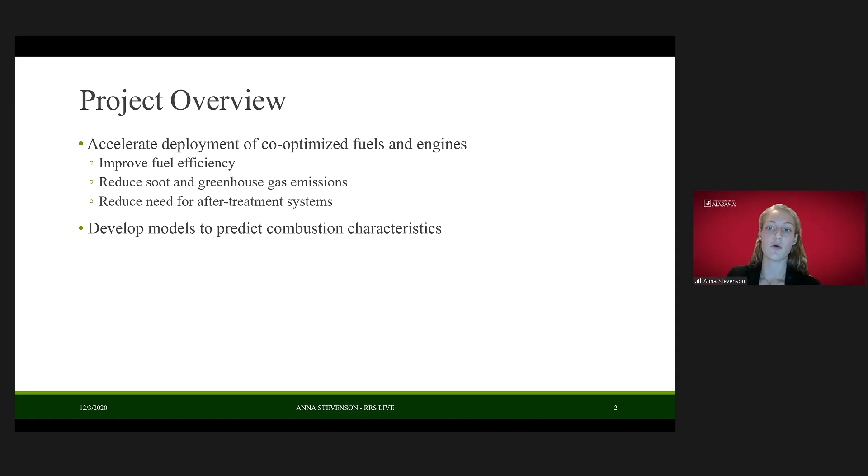Additionally, current diesel engines require expensive after-treatment systems in order to meet strict emissions regulations. So by working to reduce emissions, we can work to reduce the need for these types of systems. Our project is supported nationally at several different labs and universities, including here at UA, where our individual work focuses on developing models to predict combustion characteristics for different fuels as they combust in an engine-like environment.

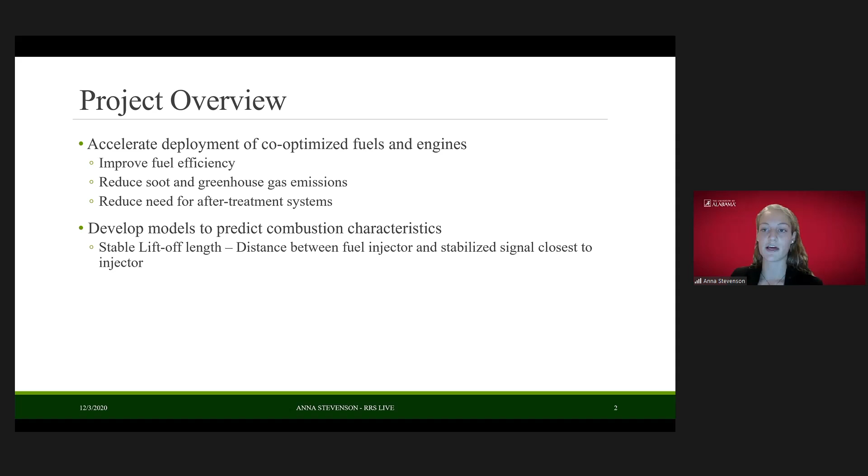There are two parameters that are typically used in order to describe combustion behavior, which I will briefly define here before going into more detail about later. The first is liftoff length, which is defined as the distance between where fuel is injected and where signal shows up closest to the fuel injector. And the second is ignition delay, which is defined as the time between start of injection, or SOI, and when ignition actually begins.

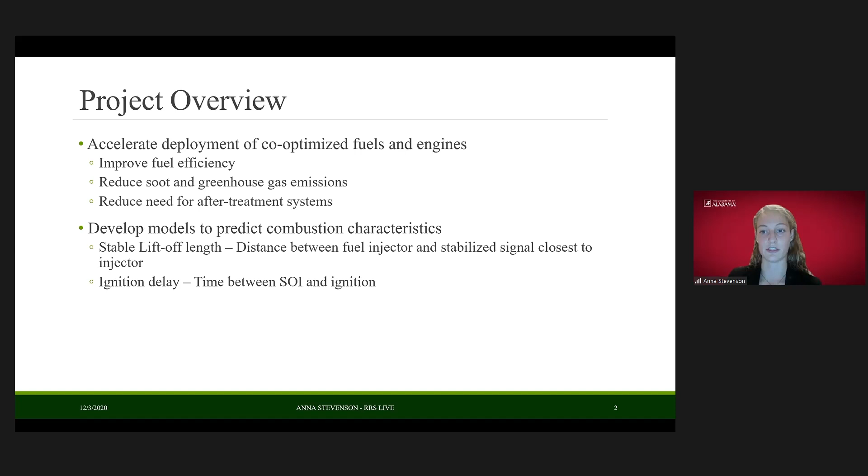In order to collect data to analyze these different fuels, we use a constant pressure flow rig, or a CPFR. Fuel is injected into this chamber, which is able to simulate ambient conditions of temperatures up to 1000 Kelvin and pressures up to 50 bar. This chamber is able to maintain highly repeatable, nominally constant test conditions, and we're able to obtain large data sets on the order of 360 fuel injections per hour, which allows us to collect large, statistically significant data sets and then analyze them. The chamber also allows for line-of-sight optical access, and we utilize 3 different types of optical diagnostics in order to study fuel injection reaction behavior.

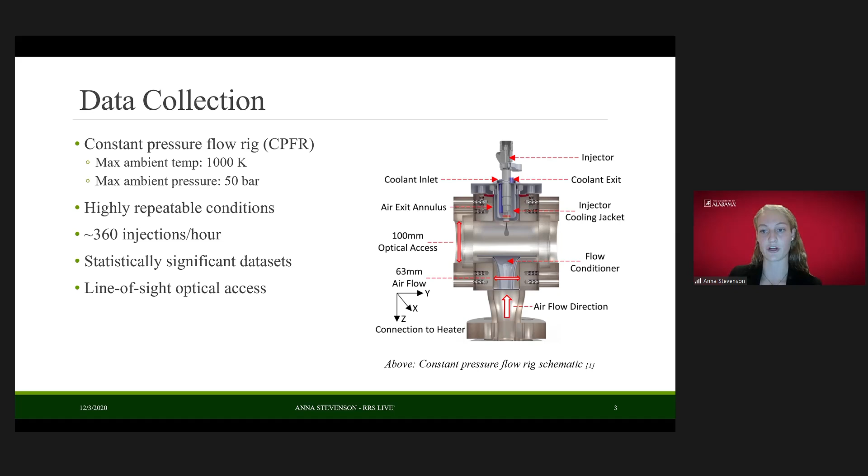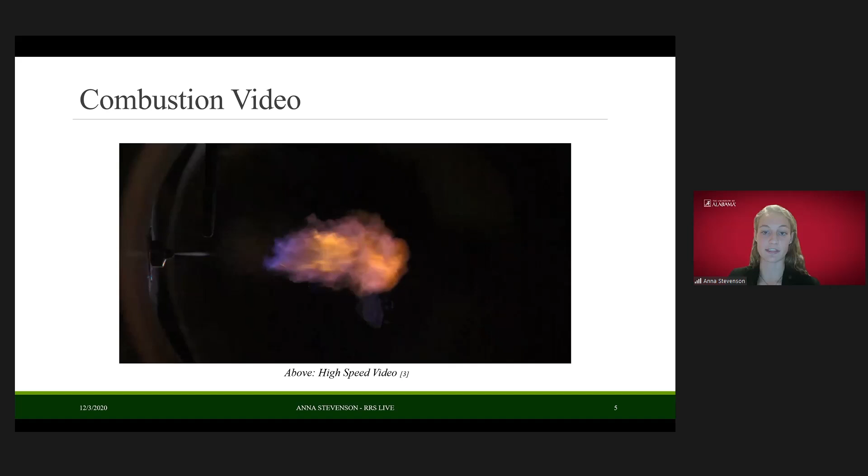This is a high-speed video of the fuel injection, ignition, and subsequent combustion processes inside of the spray chamber. The injection lasts approximately 2 milliseconds before igniting downstream. It's important to note that this video has been rotated 90 degrees for viewability, and that in actuality, the fuel would be injected and propagate downward.

This is another video that shows the simultaneous playback of 3 different optical diagnostics we use to study the fuel injection, ignition, and combustion. On the left, you'll see the chemi camera. In the middle, you'll see the RSD camera. And all the way on the right, you'll see 2-color pyrometry.

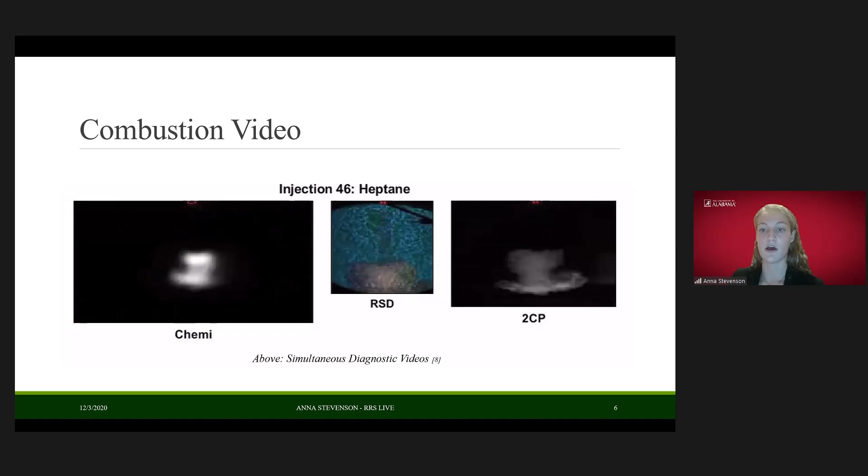Again, the chemi camera shows us flame structure. The RSD camera shows us how the fuel is mixing with the air. And the 2-color pyrometry camera shows us where the soot is forming inside of the flow rig. When you see bright spots show up in the middle of the chemi and the 2-color pyrometry frames, as well as a yellow spot show up at the bottom of the RSD frame, that indicates that ignition has begun.

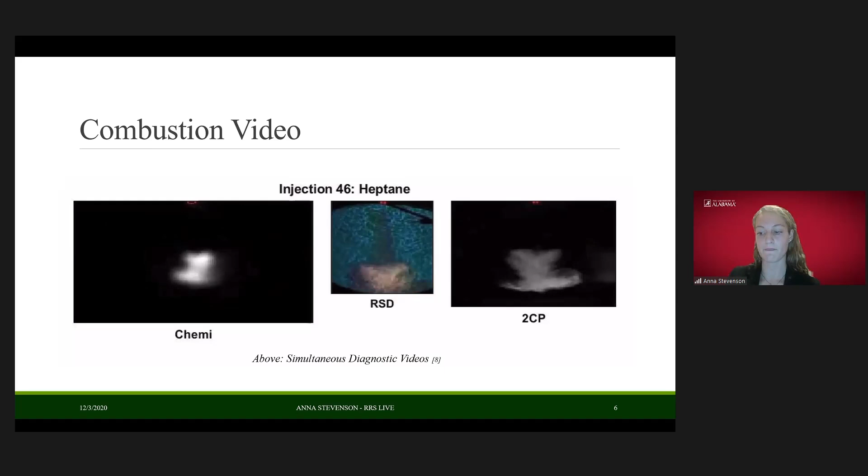My role in this project has dealt primarily with analyzing data from the chemiluminescence camera. The chemi camera provides us with qualitative information about the structure of the flame. The chemi camera picks up signal once ignition begins. So before ignition begins, there's no signal and the image is simply black.

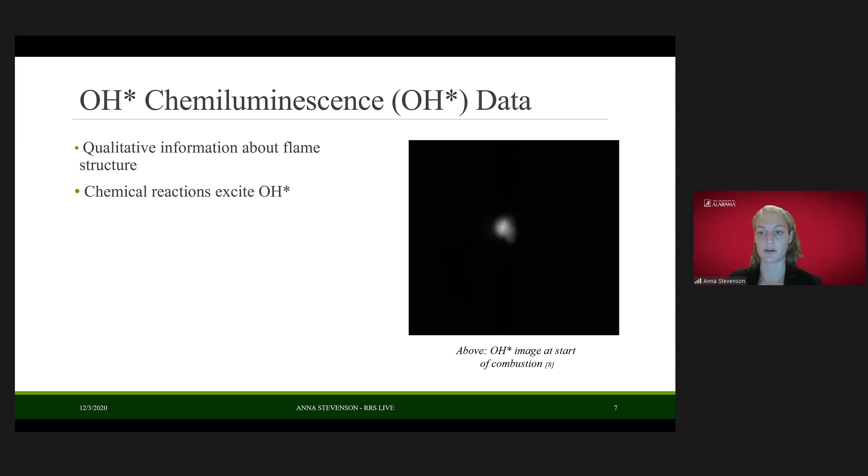Once chemical reactions excite OH, the camera starts to pick up the signal, so you start to see a bright spot. And then as the flame propagates throughout the chamber, the signal becomes most dominant where the flame stabilizes downstream.

I was tasked with using the chemiluminescence data in order to quantify liftoff length and ignition delay for N-heptane fuel, as well as 2 fuel blends, N-heptane blended with 10% butyl acetate and N-heptane blended with 20% butyl acetate.

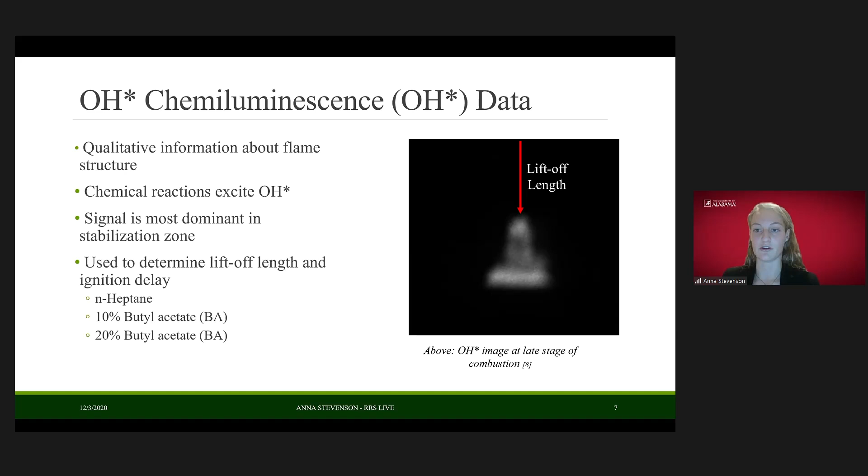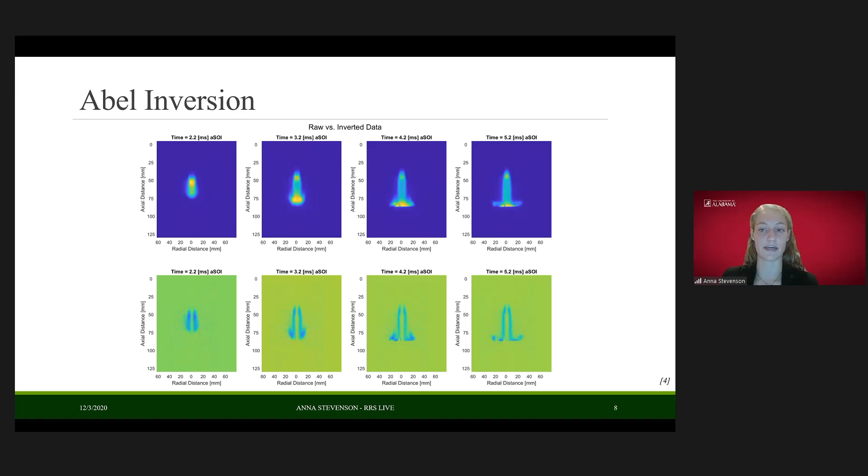The Abel transform reveals that a majority of the key reaction zones are occurring around the edges of the flame as opposed to the center, which is what the raw data might appear to indicate. Boundaries can be detected using this inverted data and overlaid on the raw data, again highlighting that the key reaction zones are occurring around the perimeter of the flame as opposed to the center of the flame.

If you imagine taking those boundaries and rotating them, you would see that the key reactions are occurring around the edges. These boundaries can be tracked throughout time, and they can also be detected fairly well, although sometimes they are affected by the presence of background noise, which moving forward we are working to mitigate.

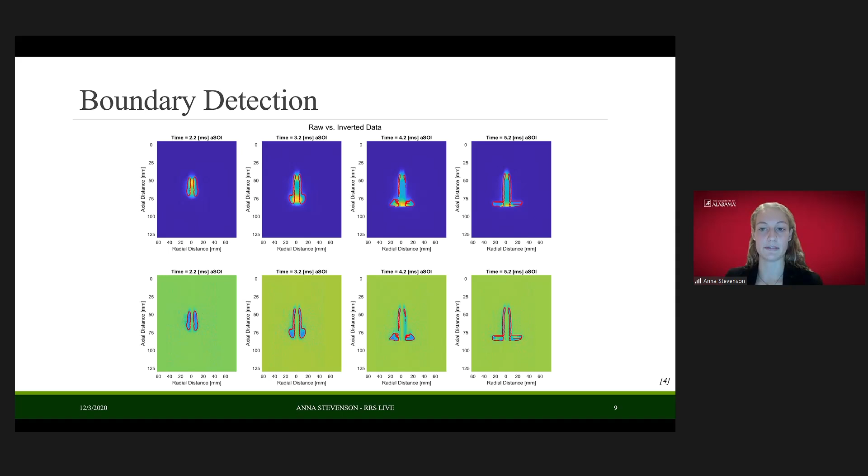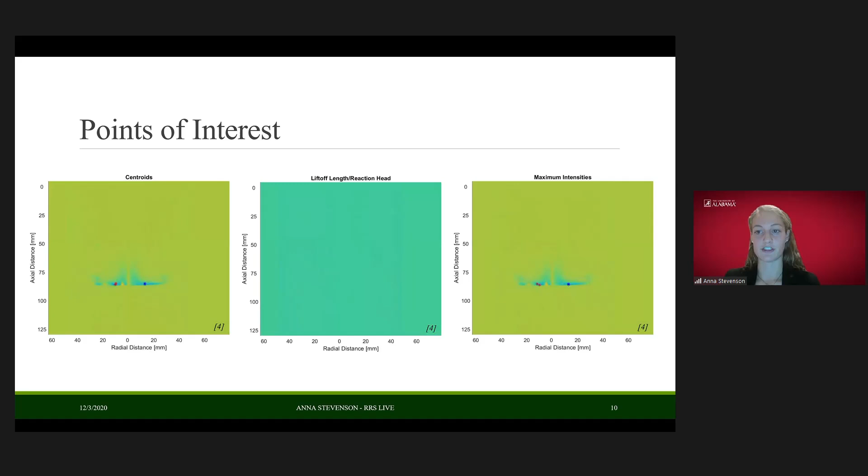The boundaries can be used, as I said, to track 3 key points throughout time for each injection. On the left, the centroid is being tracked. In the middle, the liftoff length and reaction head, essentially the extreme maximum and minimum of the boundaries, are being tracked. And on the right, the location of maximum intensity is being tracked.

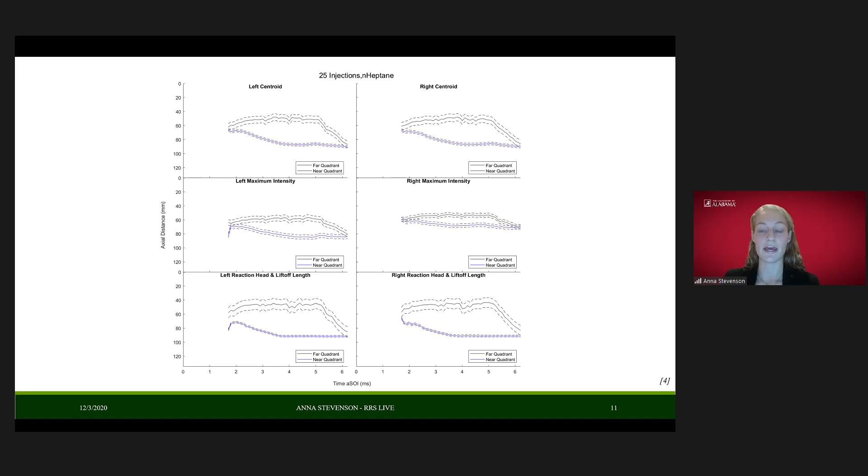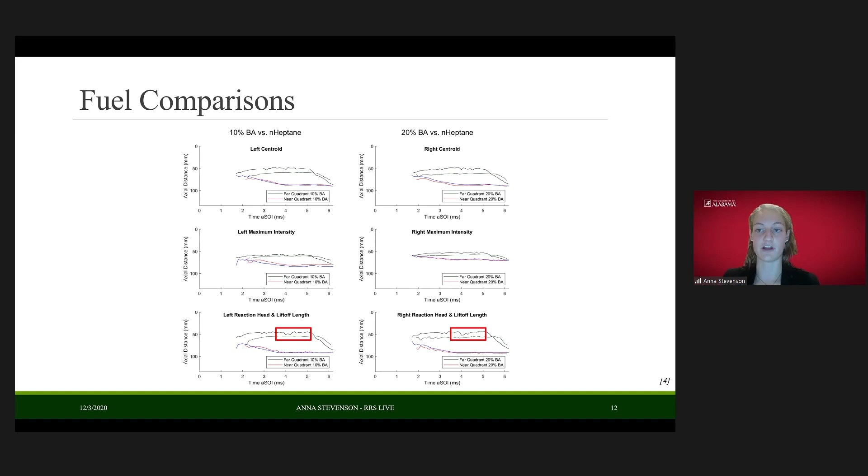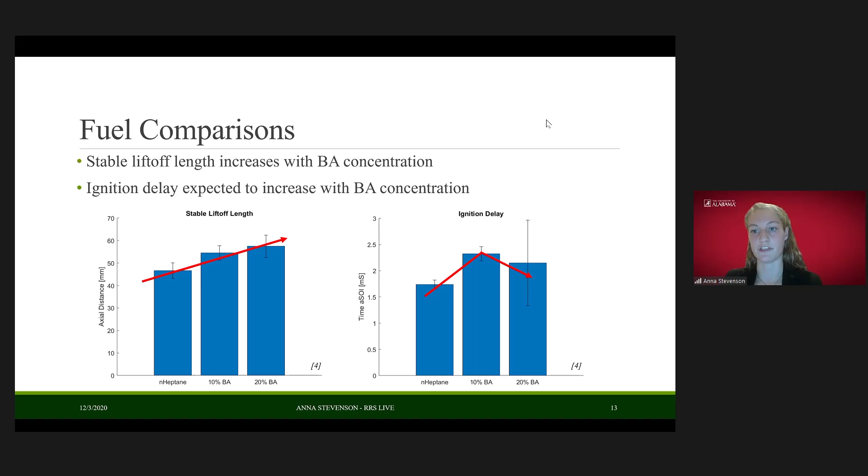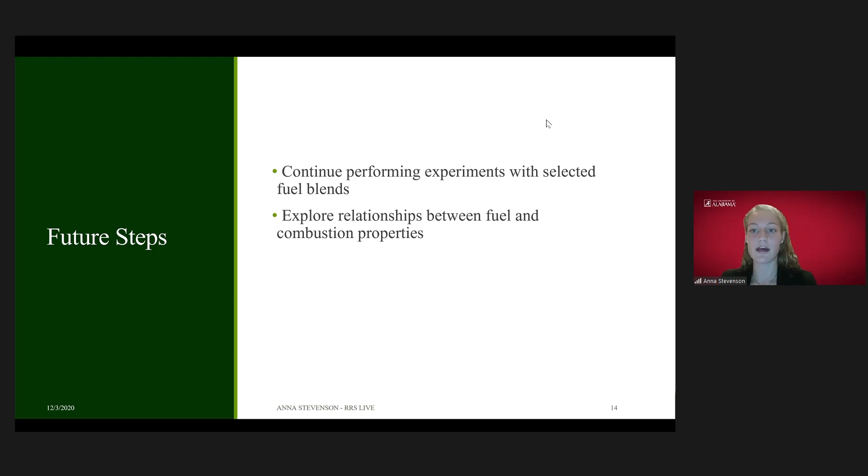And moving forward, we will be analyzing more injections in order to gain a more comprehensive understanding of both of these trends. So in the future, the goal of this project is to continue performing experiments in the chamber with different fuels and fuel blends and to explore the relationships between each type of fuel and how it combusts inside of the chamber. Ultimately, the goal is to be able to compile comprehensive combustion characteristic indicators and develop models to predict which fuels and fuel blends will be the most efficient and the least emissive.

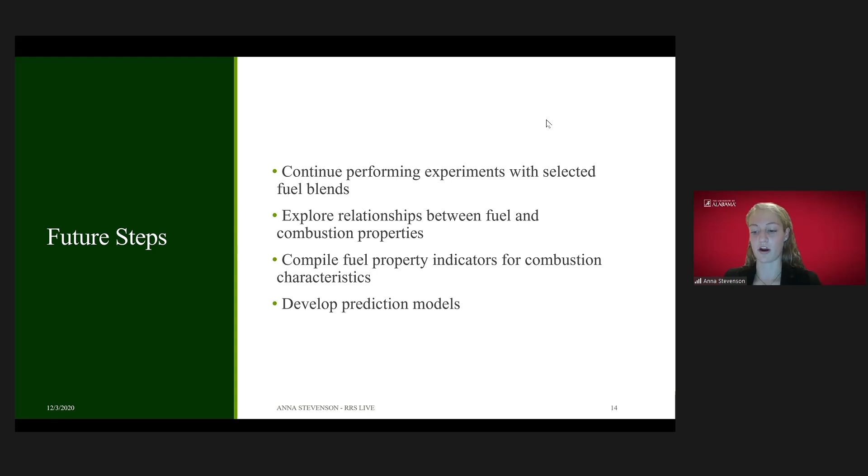Ultimately, determining which type of fuels make the most sense for public use will allow us to, as a society, combat the growing climate crisis and ultimately reduce our overall need for fossil fuels and reduce our total greenhouse gas emissions. Thank you, and are there any questions?

Anna, can you go into a little bit more depth on how the rainbow schlieren and the two-color pyrometry diagnostics work and what they're used for? Of course. So as far as the rainbow schlieren deflectometry setup goes, this slide shows on the top a typical RSD experimental setup. And so for an RSD setup, a color filter is used to measure the deflection of light rays as they pass through a test medium.

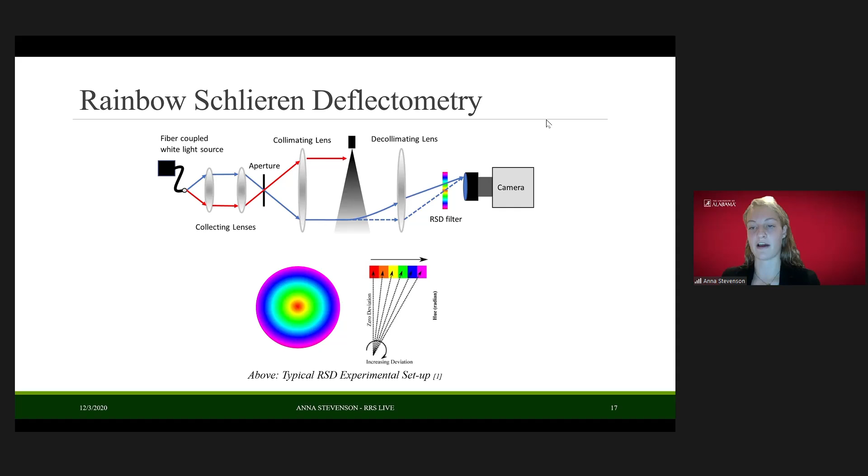And the filter that is used is a continuously graded rainbow filter, and it transmits light of a particular wavelength, or color, essentially, corresponding to the location where the light hits it on the filter. So in the bottom image, for example, the red corresponds to minimal deflection, while the violet would correspond to maximum deflection. And then you can use this color coding scheme to essentially calculate axial displacement of light and correspond that to a pixel location in the schlieren image, which I showed earlier during the simultaneous playback of the 3 diagnostics. And that displacement calculation allows us to quantify how much the fuel is essentially displacing and mixing with the air.

Why choose to research alternative fuels rather than alternatives to fuel in general? If I understand your question correctly, diesel engines already have the capability to be made fairly efficient. But like I said before, they require expensive aftertreatment, and they're not always feasible to make work for applications like jets, which are incredibly heavy.

And so moving forward into the future, I think that fuel will be the more important component than necessarily just focusing on something like improving the engine, because there are already a lot of capabilities for improving engine performance out there. But I think moving forward, especially since fossil fuels are rapidly depleting, we will need to focus on a more sustainable way to fuel traditional engines as well as modified diesel engines.